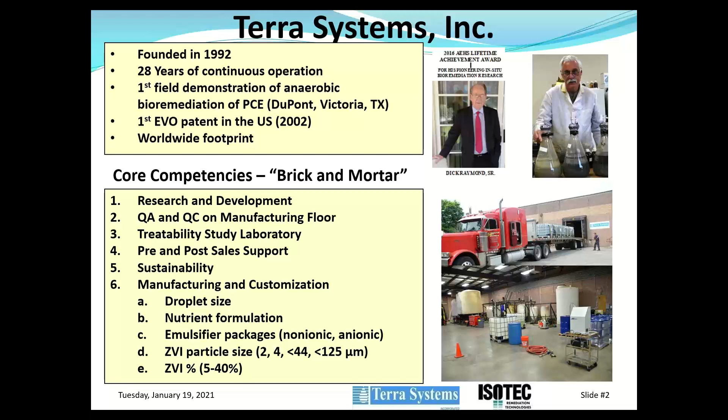We often say that remediation is a contact sport, and success requires bringing amendments and contaminants together. ISOTEC are remediation specialists with experience implementing and designing a broad range of remediation technologies, including chemical oxidation, bioremediation, chemical reductants, and combined remedies. ISOTEC brings technical experts and experienced field staff to project design and implementation, and they provide nationwide coverage and have a stellar safety record with 0 OSHA reportable incidents in their 25 plus year history.

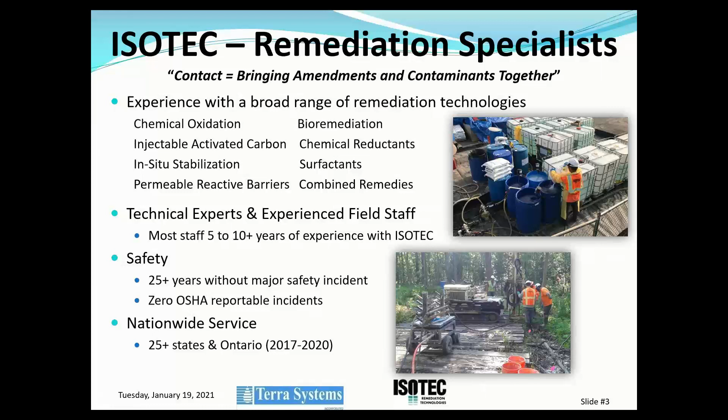We're talking today about in situ bioremediation and also abiotic degradation of chlorinated solvents. Many have seen this pathway for the anaerobic biodegradation of PCE, tetrachloroethene, to trichloroethene, to cis-dichloroethene. We generally don't see much of the other isomers of DCE, the 1,1-dichloroethene or the trans-DCE. Under biological conditions, predominantly it's cis-DCE, and then it's further transformed to vinyl chloride, and finally to the innocuous product, ethene. Occasionally we do see some ethane being produced, further reduction of the double bond to a single bond to form ethane. A lot of different organisms can carry out the first two steps, PCE to TCE to DCE, but only a couple of organisms have been found so far that can break down the dichloroethylene and vinyl chloride all the way to ethene, and those are Dehalococcoides and Dehalogenimonas. If those organisms aren't present or conditions aren't favorable, then you may see a cis-DCE or vinyl chloride stall.

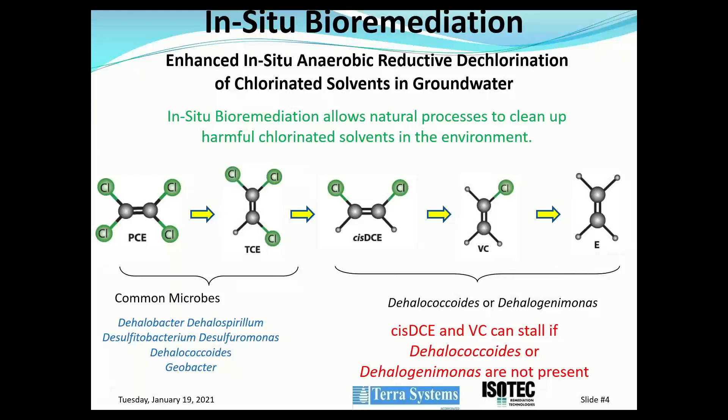So some of the products that Terra Systems manufactures are for slow release, our substrates. It's our family of emulsified vegetable oils. As Michael said, we can manufacture those in a variety of droplet sizes with a variety of emulsifier packages. Our standard product has a non-ionic surfactant, but we can also make products with anionic surfactants that are more sticky for high groundwater flow rate situations. And we also can customize the nutrient packages.

Most of our products have quick release substrate, sodium lactate, as well as inorganic and organic nutrients and vitamin B12 standard. We also have a line of quick release substrates, the sodium and potassium lactates, again with a variety of nutrient packages. And then what we're talking about today is our abiotic and biological substrates, the SRS ZVI family.

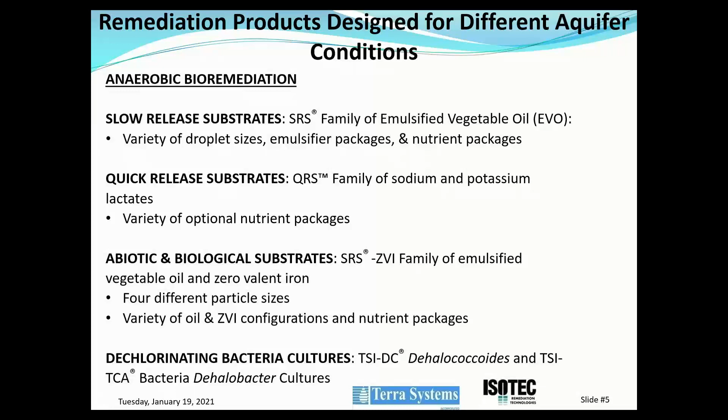Emulsified vegetable oil in Zero Valent Iron. We have 4 primary particle sizes that we use. We can do a variety of oil and ZVI configurations and nutrient packages. And then we also have a dechlorination culture that we sell, Dehalococcoides and Dehalobacter.

So when you combine EVO and ZVI, you're going to get the EVO in ZVI at the injection points, and then further down gradient, you're going to have dissolved organic carbon. And you're going to see a little different pathway for the degradation of the chlorinated solvents. Typically, you don't see nearly as much of the daughter products, and you may see production of products like dichloroacetylene or chloroacetylene, and finally conversion to acetylene.

Oftentimes, those products are transitory, and you may not ever see them, particularly the dichloroacetylene and chloroacetylene aren't on your standard VOC list. One of the other distinguishing factors of the abiotic process is you don't produce nearly as much of the cis-DCE and vinyl chloride. You do sometimes see ethene, ethane, and acetylene all being produced by the abiotic reactions.

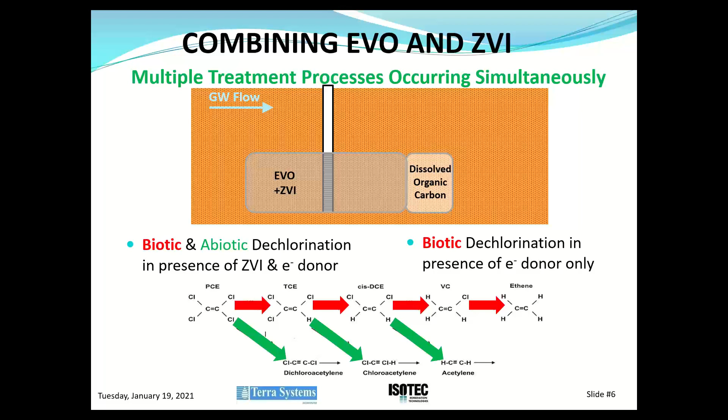So Terra Systems has 2 primary ZVI oil combinations. The SRS EZVI, which is under the NASA patent. It's a mixture of soybean oil, 10 to 17% of the ZVI. Typically, we're using a small ZVI that's highly reactive. It also includes water and a surfactant.

We're using either a 2 or 3 micron ZVI suspended in glycerol, often with a sulfidation process for enhanced reactivity and longevity, or a 4 micron ZVI powder. And this material is injectable into wells or by direct push.

The other product that we sell is the SRS ZVI. It's licensed under the IET patent. It includes soybean oil, surfactants, sodium lactate, organic nutrients, inorganic nutrients, and vitamin B12. So it's our standard SRS package.

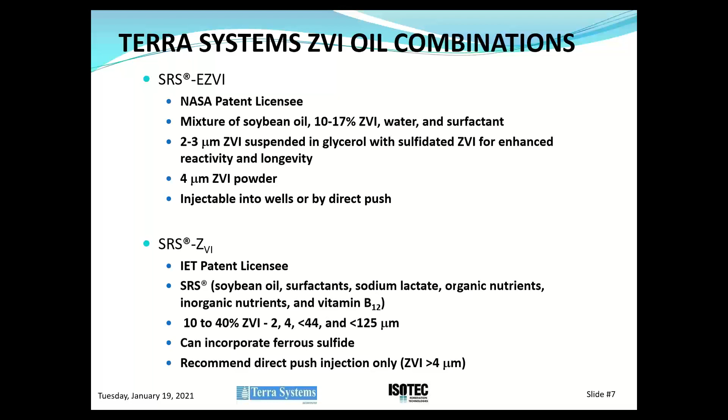And then we can customize the amount of the ZVI from 10 to 40%, and also this particle size. We've typically used either a 2 or 4 micron material or less than 44 and less than 125 micron ZVI particles. We can incorporate ferrous sulfide again for enhanced reactivity and longevity. And we recommend direct push injection, particularly for particles that have greater than 4 micron ZVI.

I'm going to walk you through a couple of case histories where our materials have been applied. The first is at an upstate New York airport. It's a former fire training pit. The geology is an overburden and fractured bedrock.

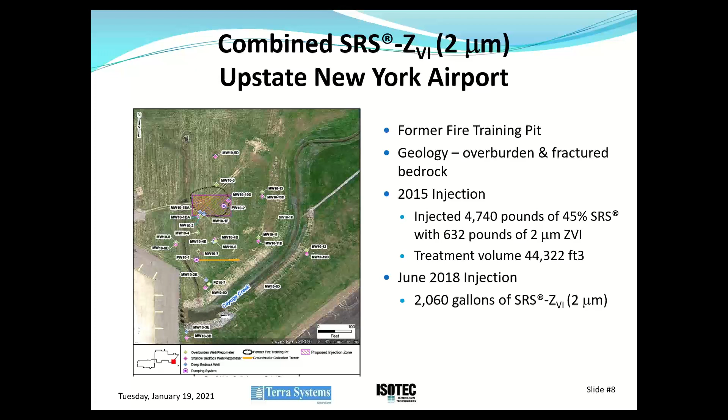2 injections were performed in 2015. In the first one, with about 5,000 pounds of the SRS and 600 pounds of the 2 micron ZVI. Treatment volume is about 44,000 cubic feet. And then a follow-up injection occurred in June 2018 of about 2,060 gallons of the combined product.

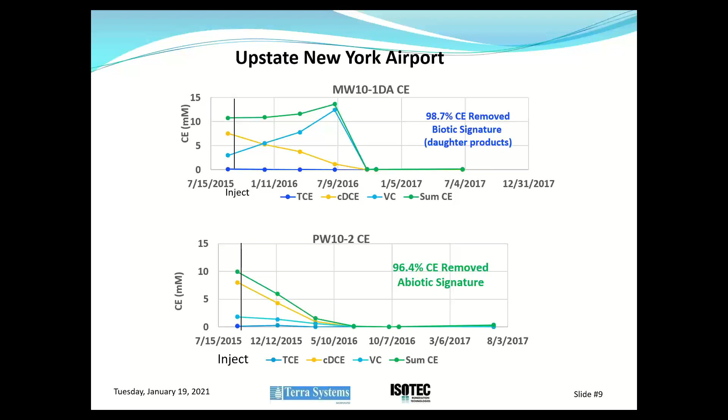The next project is a groundwater site in North Carolina. It's a very high groundwater flow rate of about 6 feet per day. It's sandy soils. Several different injections have been conducted there. It was a pilot in March of 2015, followed up by full-scale injections in September of 2015, and then another full-scale injection in 2017.

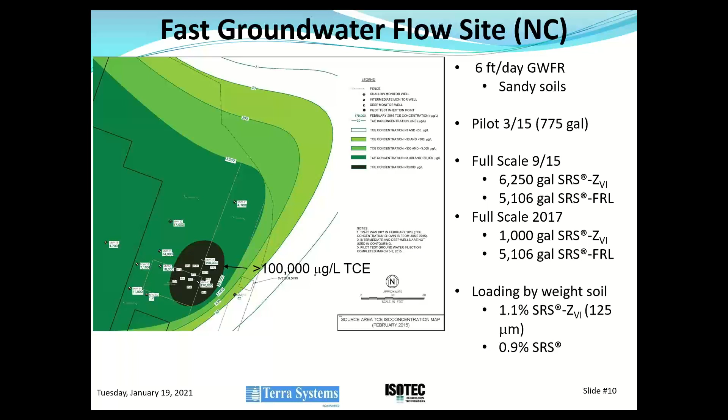We point out the area over in black is greater than 100,000 micrograms per liter of TCE. So it's very high concentrations of TCE. The loading rate here was about 1.1% of the SRS ZVI, with 125 micron ZVI particle, and about 0.9% SRS.

So this shows the results for one well, MW6. We're seeing conversion of TCE rapidly after the injection of the material shown in the black line, with production of some vinyl chloride, and then out at about July of 2018, we're seeing a good bit of ethene. Overall, we're seeing a 93.1% removal of the chlorinated ethenes over this treatment period.

And we're seeing TOC concentrations coming up to almost 12,000 milligrams per liter at some point after the injections, and this sustained release of TOC above 2,000 milligrams per liter for over 2 years. Next slide.

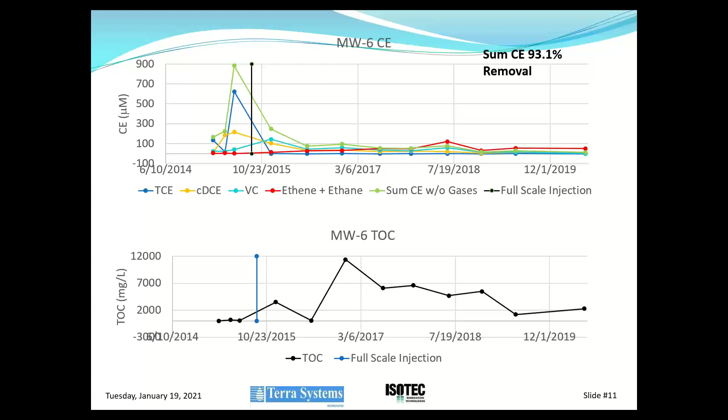So this slide shows the percent removal of the chlorinated ethenes. You can see the injection wells shown in black. The red ones are the subsequent injections in 2017. And we're seeing very good removal within that treatment area for most of the wells. Remember, we started at over 100,000 micrograms per liter of TCE, and we're down to at most 18,000, and many of the wells were down to much lower concentrations of TCE.

Overall removal, shown in red, was very good for most of the areas, 93, 99%. Then a couple of wells showed a little bit less, like MW13, kind of in the middle of the screen, which hasn't shown as much removal, but probably needs additional follow-up treatment in that area. And the wells outside of the treatment area surely show no improvement, like MW21 and MW22 up at the top that weren't treated with the products. So very good removals of the chlorinated ethenes at this site. Next slide.

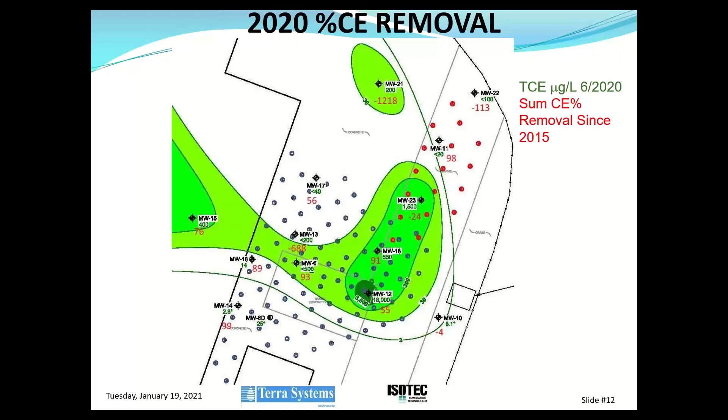I'm going to turn it over to Paul Dombrowski. All right, well, thank you, Mike, and thank you, Michael, for the introduction. I'm going to talk in this presentation...

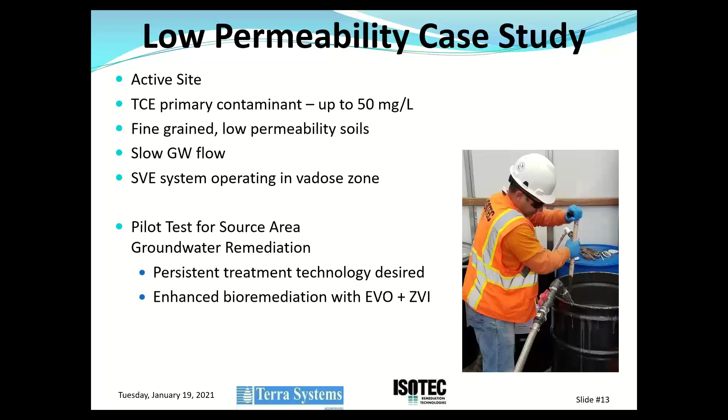We're going to focus on 3 case studies where EVO and ZVI were used together, and each of these sites has a very different geologic setting. So the first site is a site where the soils are primarily glacially compacted, fine-grained sands. As a result, this is overburdened, very low permeability soils. In evaluating different technologies, ISOTEC collaborated with the client and the consultant to evaluate different approaches, and an enhanced reductive dechlorination approach was selected, looking for a technology that was going to have persistent ongoing treatment. And we selected emulsified vegetable oil with zero valent iron.

Next slide. So we started with a pilot test, about 900 square feet in area, focused on where the highest concentrations had been observed on site. We looked at 9 direct push intervals using direct push injection. There was a spacing of about 11 to 12 feet between points based on different access and the like.

And we injected using ISOTEC laser cut stainless steel screens, shown in the photo on the right. These screens are approximately 1 centimeter in diameter and have 10 slot openings sliced into them to allow 360-degree flow all the way around. In our experience, we're able to inject the EVO ZVI, with the ZVI in the 2 to 4 micron size, at relatively low pressures -- anywhere less than 10 psi, maybe up to about 40 psi maximum, and a lot of that has more to do with the geology than the actual screen size.

And our screens are available in lengths of 1 foot to 8 feet in 1 foot intervals. We choose screen sizes based on the site geology, and we will often even use different screen sizes across a given site based on what the stratigraphy is telling us. Next slide.

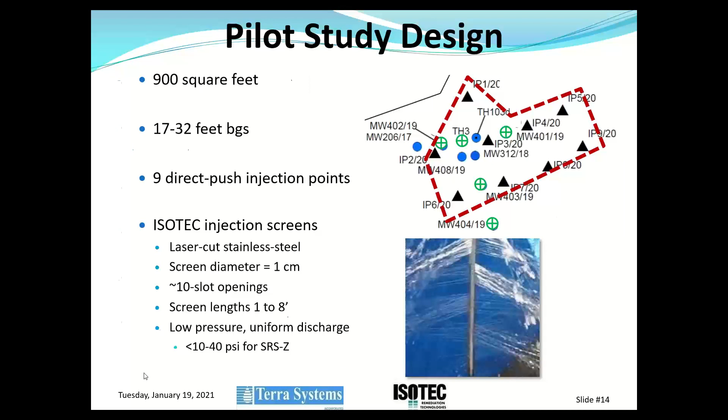So here are the preliminary results, from sampling 2 and 4 months post-injection. This top plot is monitoring well 401, which is right in the middle of the pilot test area. This well had a concentration of 50,000 micrograms per liter in the sample collected shortly before the injection. Then 4 months after injection, the TCE had been reduced to 20 micrograms per liter. We're generally seeing very limited reductive dechlorination daughter products, the DCE and the vinyl chloride. So this well showed a very strong abiotic dechlorination signal, showing just how quickly and significantly the use of zero valent iron with the EVO can achieve reduction in high concentrations of chlorinated solvents.

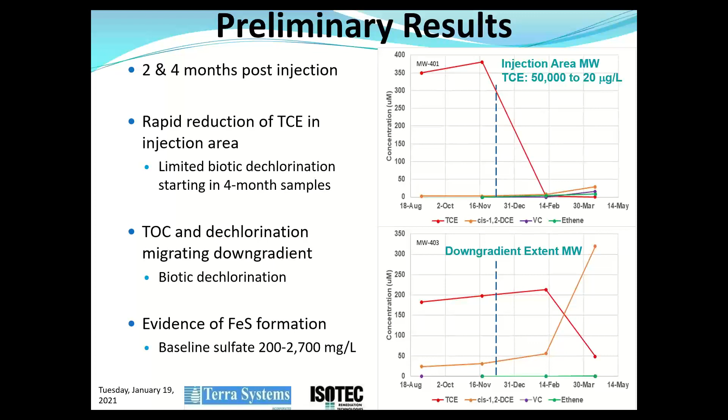One other interesting note about that project: there's a soil vapor extraction system operating immediately above our pilot test area. It was very interesting to see an inflection point in the CVOC extraction rate, in pounds per day, right after our injection was performed. We're also seeing a larger fraction of non-TCE VOCs in the extracted vapors after the pilot test than before, which shows we're resulting in reduced CVOC collection by the SVE system.

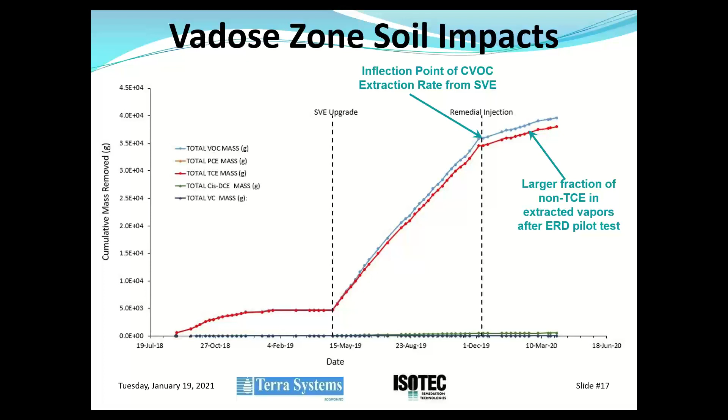At this site, various pilot tests had been performed over time, and given those results, reductive dechlorination was chosen as the full-scale approach.

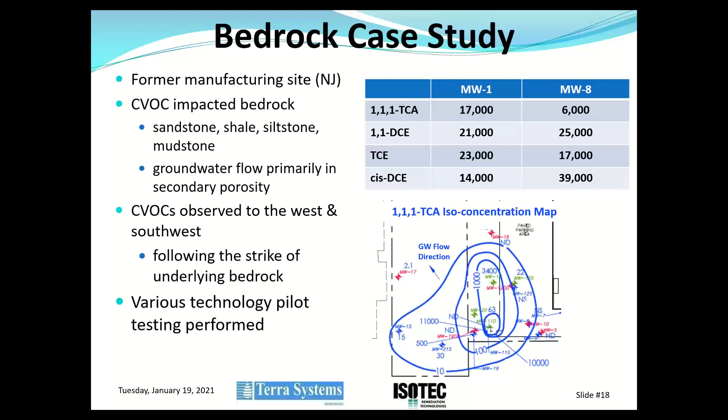For this site, the client's consultant selected a remedy of in situ dechlorination for the source area, where concentrations were highest, and longer-term monitored natural attenuation in areas with groundwater impacts further downgradient of the source area. The project's immediate objective was to reduce all CVOC concentrations below 1% of NAPL solubility.

Again, we're focused on reducing concentrations in the source area, but other objectives included establishing natural attenuation conditions that would support a reducing trend over time, achieving those conditions both in wells in and around the source area and downgradient of the injection area. It was desired to have monitored natural attenuation conditions established and observed, and this client also had interest in incorporating sustainable remediation processes into the project.

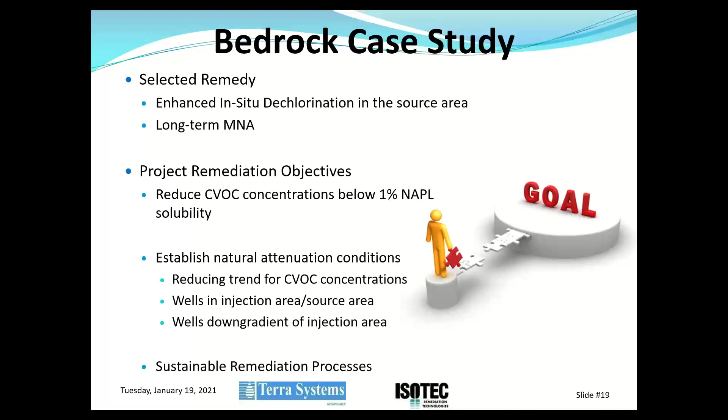When ISOTEC was looking at the request for proposal for this project, we thought, how are we going to achieve the best reduction in the high concentrations, as well as establish monitored natural attenuation for the site?

We elected to go with a series of liquid ERD amendments. We wanted amendments that would include carbon substrates and continue to migrate after injection, and that could be injected at relatively low pressure. In this case, we wanted to preferentially deliver the amendments into the existing bedding planes and fractures where the high concentrations of CVOCs were located, in contrast to other amendments that may be slurries injected at much higher pressures, which could actually create new fractures where CVOCs were not located.

As Michael noted at the top of the presentation, contact is the most important aspect of any successful remediation. So we wanted to make sure we could deliver the amendments to where the contaminants are located. We also incorporated inflatable packers so we could target identified fractures where the CVOCs were located, and we proposed using multiple ERD amendments, which I'll describe further on the next slide.

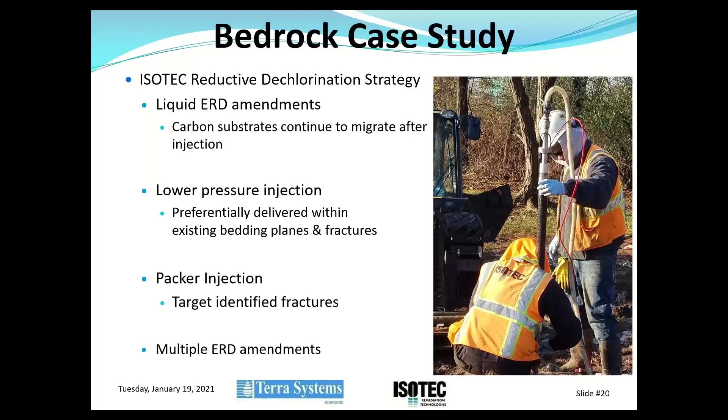ISOTEC proposed using a series of amendments injected sequentially. The first step was injecting sodium lactate as a quick-release substrate, selected to accelerate the process of establishing reductive conditions in the source area, in the injection area.

The second sequential step was a small droplet EVO, the SRS-SD. With this, we wanted a longer-term carbon substrate that also had a higher potential for migrating throughout the injection area and further afield, to further allow natural attenuation and reductive conditions outside of our injection area.

The third component was SRS-ZVI, using a large droplet EVO with a 2-micron ZVI. This was selected because we wanted to keep the ZVI and EVO as close to the injection wells as possible.

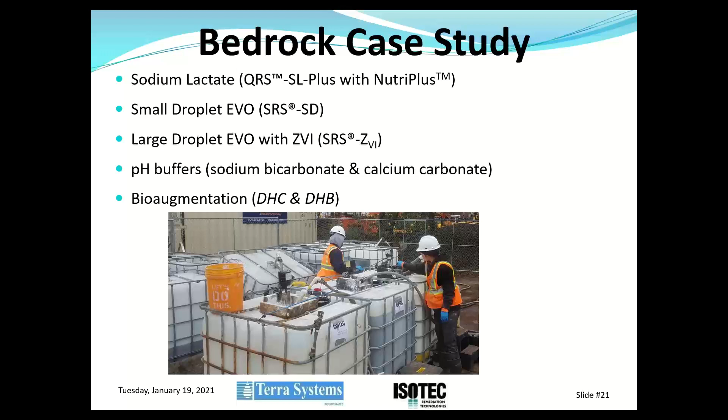The injection wells were right in the area with the source area, so we did not want that EVO to migrate outside of that area. We wanted a long-term, persistent carbon substrate that would establish ongoing reductive dechlorination. In addition, we use a series of pH buffers that are both quick and longer lasting, as well as bioaugmentation with Dehalococcoides and Dehalobacter for both the chlorinated ethenes and chlorinated ethanes.

The injection program itself used 12 injection wells. These wells were open boreholes, 4 inches in diameter, drilled to 55 feet. We used straddle packers to identify the fractures of interest. In general, all of the injections were performed at 10 to maybe a maximum of 70 psi, which is a relatively low pressure when you're dealing with bedrock at 50 to 60 feet below ground surface.

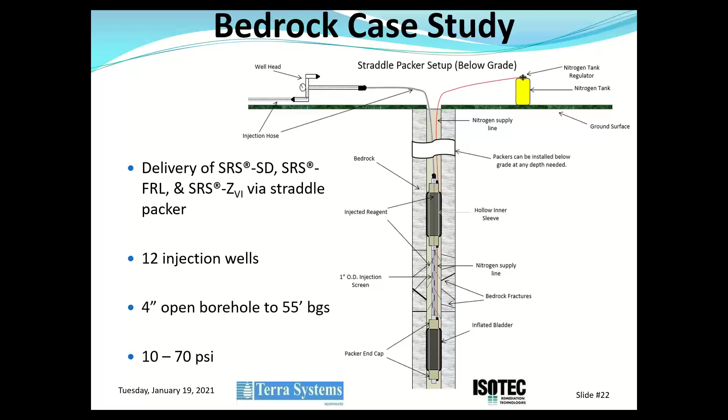So these are the results we have thus far. To date, there's been 12 months of post-injection, and we see on both of these plots very rapid reduction of CVOCs, including the wells that had very high concentrations, to the point where we're achieving 99% reduction in multiple wells in the injection source area, which given it was bedrock, given the high concentrations, given the potential likelihood of some non-aqueous phase liquids, exceeded even my best expectations. We're quite pleased with the results so far.

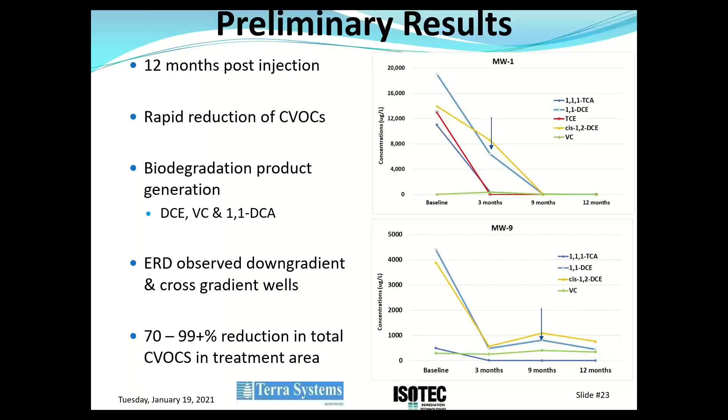We're also seeing some lines of evidence of biodegradation products, in particular DCE, vinyl chloride, and a little bit of 1,1-DCA. We can see that in the orange line here, which is the cis-DCE, which in the bottom plot increases and then subsequently decreases. In the top slide, the slope doesn't correlate with the other parent compounds, which is more abiotic. So we see a decrease, but it's a slower decrease because we're seeing production over time. Within the whole treatment area of the monitoring wells, to date, we're seeing 70 to 99% reduction in total CVOCs.

As I mentioned, the client had great interest in incorporating sustainable remediation into various aspects of the project. One of the primary ways ISOTEC achieved this was with our reagent selection. ISOTEC worked very closely with Terra Systems to have a smaller environmental footprint for our amendments, and notably, the Terra Systems facility was located less than 90 miles from the site.

We used a similar approach of ZVI and EVO on another project this year, and those amendments were shipped from facilities in the upper Midwest. So that distance is 600 to 900 miles, significantly more trucker miles and emissions from that.

We were also able to have all three of the amendments used delivered in a single delivery, so there was just one truck. Terra Systems also procures soybeans from mid-Atlantic farmers. There's a big push now of farm-to-table dining—well, this is farm-to-ground remediation, knowing where our soybeans come from and reducing that distance from farm to field. As a result, Terra Systems was able to offer a zero carbon footprint certification for this project and all the amendments.

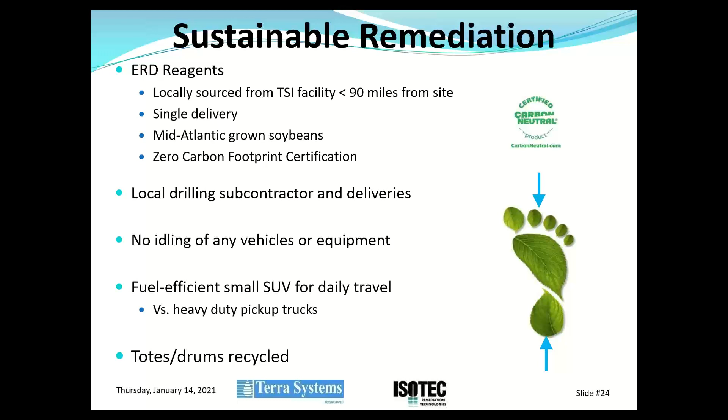When ISOTEC was first looking at this site and working with the consultant, we noticed very high PID readings in the deep overburden in the multi-phase extraction wells when they were installed almost 20 years ago. We saw that there was likely residual TCE still in the deep overburden in the zone that was not being extracted by the extraction wells. So that was an area of focus that we wanted to look at.

Starting out, it was proposed to do a small pilot test. It was only three points, but we focused on the interval right at the bottom of the sandy silt and the top of the weathered bedrock. This is a New England site. In our experience, we have several sites where a direct push drill rig could advance some distance into weathered bedrock just by pushing, and we wanted to evaluate if that was the case.

In our three points, we were able to advance anywhere from 6 inches to 2 feet into the weathered bedrock, and in that case, then we injected. We first injected a small narrow interval using the ISOTEC laser cut injection screens that I showed on a previous slide. We first injected focused in on the weathered bedrock, and then we had an injection interval immediately on top of the weathered bedrock.

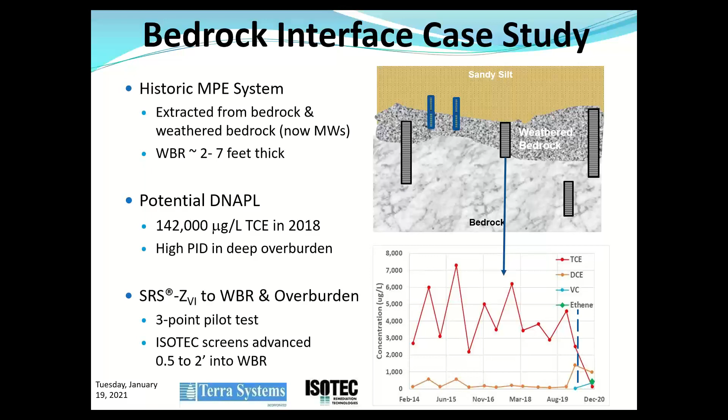We also saw an increase in the cis-DCE followed by subsequent decrease, and we're also seeing elevated concentrations of ethene in the 200 to 300 microgram per liter range.

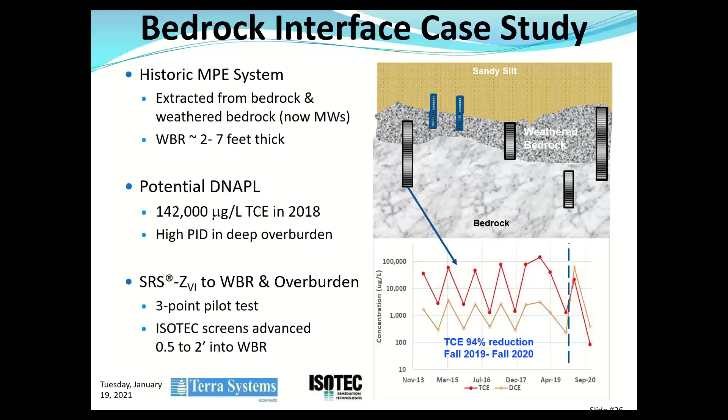However, 12 months after the injection, TCE is 94% lower than it was in the fall of 2019, one year earlier, and note this is on a semi-log plot. There was an initial increase in the cis-DCE with a subsequent decrease in the cis-DCE as well. So we're seeing both abiotic and biotic signals in these monitoring wells, but also accompanying that significant reduction in concentrations that is quite rapid.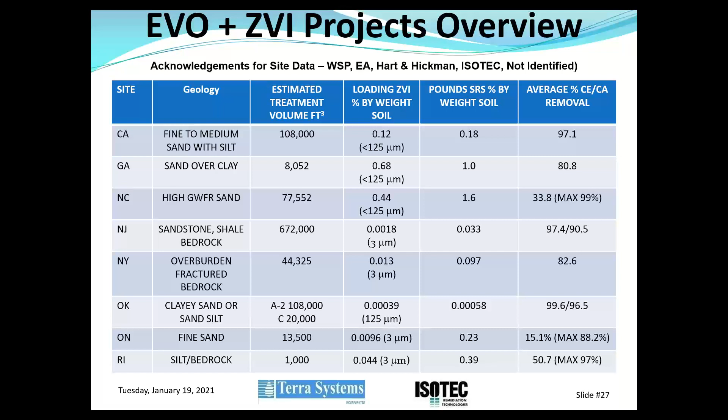We're seeing very good removals in most of those zones. A couple of wells, like sites in North Carolina, maximum removal or average removal is about 33.8% with a maximum of 99%, so there's a couple of wells that need additional treatment. But overall, we've had very good results with the ZVI products and been able to deliver them into a variety of geologies.

At this point, we'll wrap up our presentation, and we'll be able to take some questions from you.